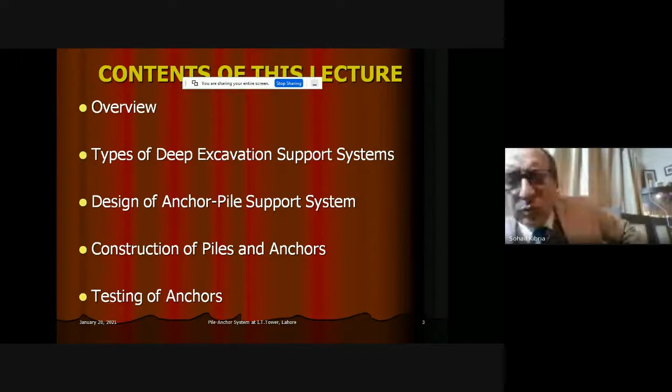Sorry for that. So very quickly, this is going to be a long lecture, and I hope you will bear with me. I have tried to make it interesting, but I'll be passing through quickly. Such lectures, which are of short duration, 1.5 to 2 hours, are not meant to give you everything and not meant to make you a real expert, but they prompt you. Such lectures always give you a lot of information. They prompt you to make a further supplementary study of manuals or books or through the internet, going to credible sites.

I'll first give you an overview of what this deep excavation support system business is and why it is necessary. Then I will define various types of deep excavation support systems, because it is not the pile anchor system which is the only system available. Even in our country some other systems are being tried, and worldwide there are many systems available. Then I'll discuss in detail the design of the anchor pile support system, the design of anchors and the design of piles, and then how they have been constructed, particularly at this tower location.

And then I'll concentrate on the quality control aspect: testing before construction of the working anchors or contract anchors, and testing during their construction. So let's have an overview.

Why are these required? We should all know that it's not only Lahore, rather all the big cities, all the metropolitan cities in Pakistan and abroad, the land is getting scarce and expensive. So people are concentrating in big cities to raise vertical buildings. If vertical buildings have to be there, then naturally they will need basements for car parking purposes and other purposes too. Taller the building, generally more will be the number of basements. And so when we have big, deep basements, we have to have deep excavations.

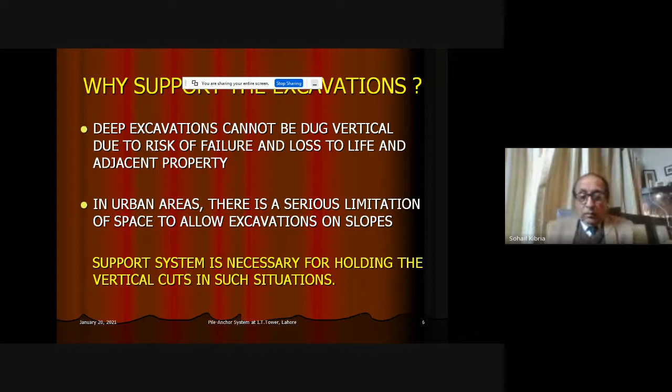So here we conclude that we have to provide such support systems. Support systems have generally been provided here as temporary works, that is, to aid in holding the vertical sides of the excavation as the construction proceeds.

And then they become useless. Some engineers consider this a waste of money. So why not build them as part of the permanent works, as part of the permanent structure? This can also be done. So both approaches are there.

If we have to design for permanent conditions, such pile anchor systems have to be heavier, with increased safety factor, and the materials and other specifications will also be stricter. But this one, the IT tower, has been designed, its excavation support system has been designed as a temporary support system. Now, what are the various support systems which are available?

One is very common, conventional reinforced concrete retaining walls. In common houses, like double-story houses, you see basements, so people will make basements either of brick masonry or of thin reinforced concrete wall. Both options go side by side, but damp proofing is a real issue. In many other areas, reinforced concrete walls can be constructed to a deeper level.

Then another option is the sheet pile, a thin sheet of metal structure, and they act as a deep system going into soil, and they are called piles also, sheets driven. They're driven normally. The basic issue is that they are not manufactured here, so their availability at short notice is difficult. Then the third type is RC, meaning reinforced concrete diaphragm wall and tieback anchors.

Sometimes we can construct a thin wall of concrete called diaphragm wall with special equipment. It may have anchors, or if it is not deep enough, it may be without anchors.

Then there is another type which is called soldier piles, pile and tieback anchors and lagging. I will explain to you what is meant by lagging, what these horizontal elements are. Then there are soldier piles with struts, the compressional elements, using frames. Then soldier piles have been used with tiebacks, and this is the case of IT tower, soldier piles and tieback anchors, anchored and tied back into the backfill.

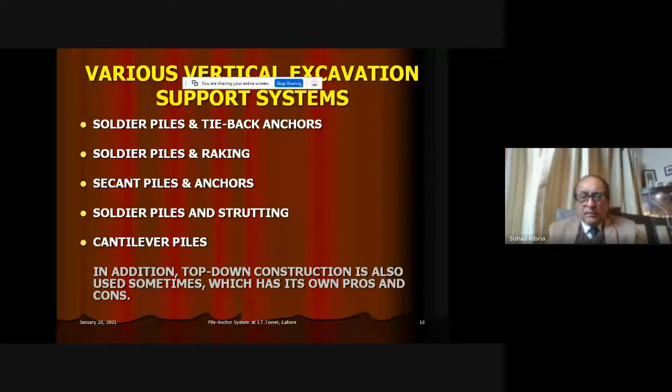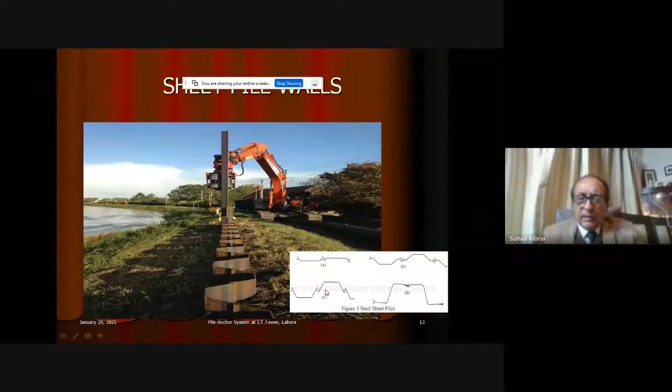Here you see a view of the sheet piles being driven by this heavy machinery. You can see this trapezoidal section of sheet pile on your screen. There are many other options available in the cross section of sheet piles. These can be manufactured into any desired cross section and of any thickness depending on the requirement. So here you see some of the cross sections of sheet piles, units which can be interconnected easily.

What's the diaphragm wall? It's a thin reinforced concrete wall.

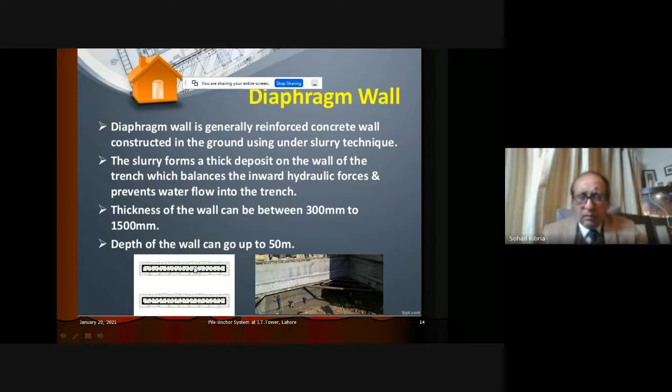When the whole long excavation is completed, it is filled with reinforced concrete. This is how a diaphragm wall goes. Deeper diaphragm walls do have tieback anchors too.

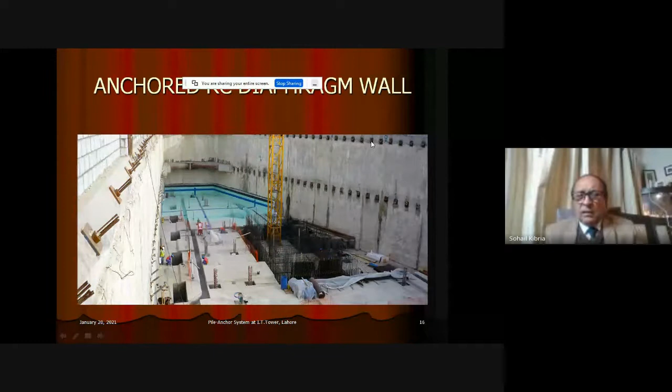Here is a view of a deep diaphragm wall secured with anchors. Can you see these anchors? These are the anchor plates, and this is the raft of the basement. In place of anchors, if you don't want to go for anchors, we can use strutted struts or a strutted kind of frame within the excavation.

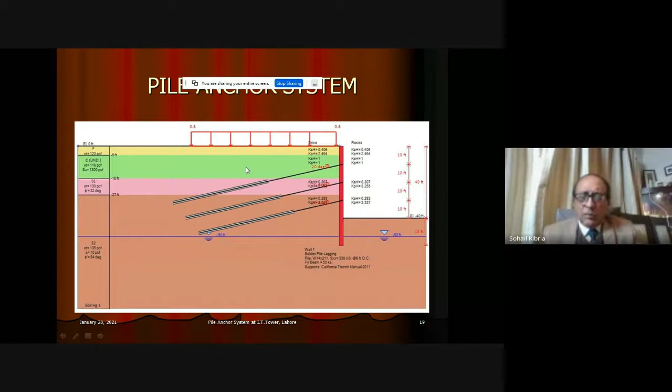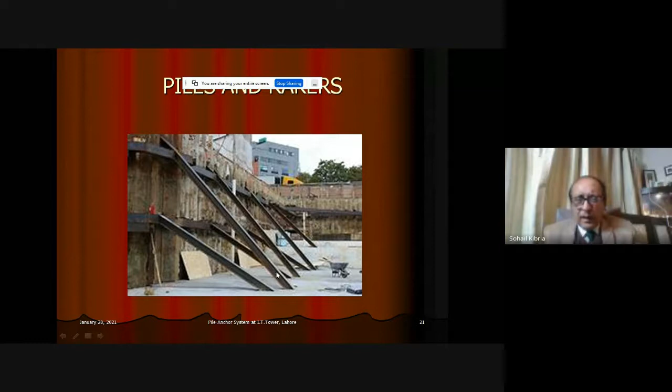So here, the wall of piles is supported with wales, and the wales are in turn supported by inclined supports, the rakers or the rakes.

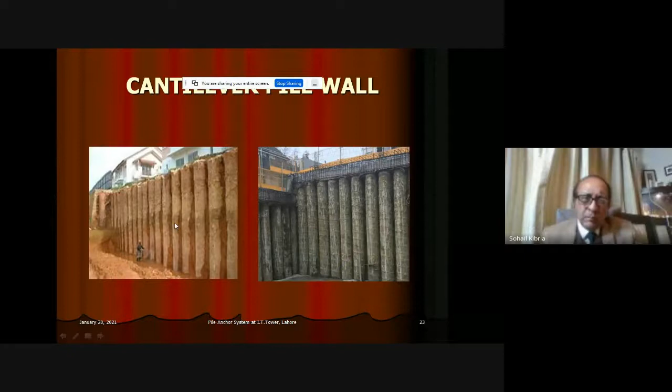Here, you have the reinforced piles, and there is a clear gap between all the adjacent piles, so that the soil is supported by arching. This is kept in such a way that the soil will not get squeezed out. And in tangent piles, the pile surfaces are exactly touching each other.

But don't think that this is a good waterproof system. If you have a high groundwater table and want to construct tangent piles there, water seepage will occur. It will not be successful. To control the seepage of water and to guard the excavation against high horizontal thrusts, secant pile walls are used.

There are different kinds of secant pile walls, two of which are more common. One is the type which is cutting hard to soft or hard to firm, meaning there are two types of piles: one reinforced, the other unreinforced. First, the primary piles are made, and they are unreinforced.

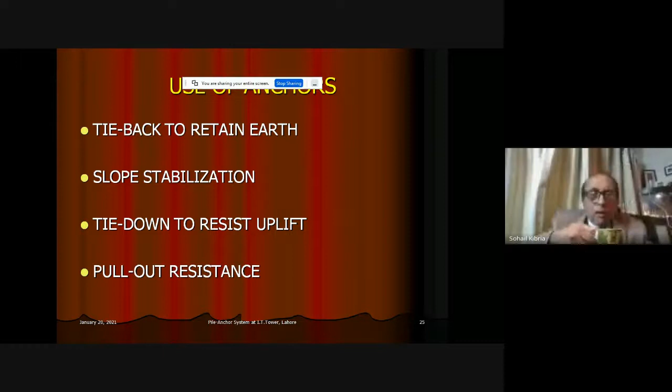Similarly, when there are pull-out forces, we sometimes provide anchors to resist the pull-out thrusts. Anchors are used for both temporary and permanent systems.

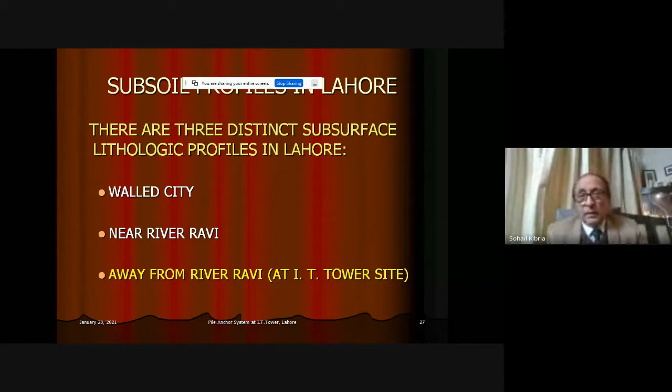So, jumping to the IT tower, let's look at the soil condition and the subsoil characteristics in Lahore. First of all, Lahore has three different subsurface lithological profiles. One is the typical profile of the walled city, where we have deep fill, like 35 to 40 feet, generally very big, very wet, and very heterogeneous, not reliable.

Second is the deposits of soil near the river Ravi, because Lahore is laden by the deposits of sand of river Ravi, which are fine sand generally, with a variable content of silt. But as we move away from river Ravi, the stratigraphy changes. We have silt deposition, and the thickness of the cohesive silt cover, or low plastic silt cover, goes on increasing. So at IT Tower, we are having this kind of situation.

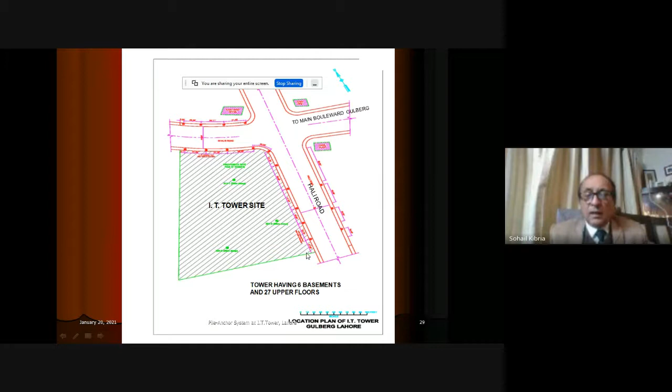So if you look at the IT Tower, it is standing there. It has 6 basements and 27 upper floors. If this is Hali Road, there's a road coming from Main Boulevard running parallel to Hali Road. At this corner is the IT building. Many of you might have seen this building, and you can see there are adjacent properties, roads on two sides, and buildings already existing on the two sides.

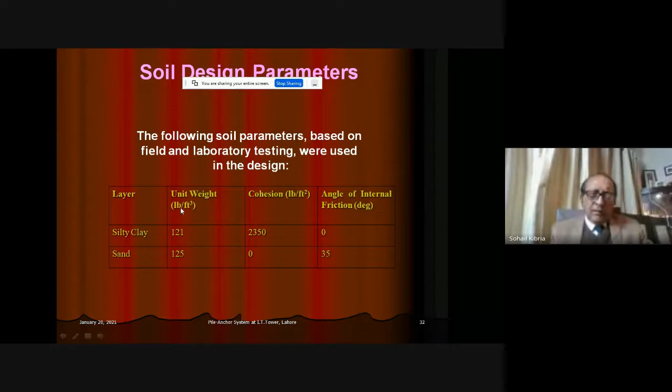So typically, just to show you a glimpse, we call it silty clay, although this is silt of low plasticity, and like that.

What has been discussed, I'll be concentrating on the geotechnical design. Structural design is a separate entity. Here we will be discussing the geotechnical design.

Several procedures given by several notable codes and manuals are available. The first one is the Federal Highway Administration of US's code. Then there is the Canadian Foundation Engineering Manual, which gives a different procedure, considered more complicated, requiring more rigorous analysis, and making force polygons looks difficult. NAVFAC, Naval Facilities Engineering Command of US Navy, manual gives a simpler method but is considered rather conservative, so any facility constructed with this will be expensive. Besides, the trenching and shoring manual also mentions this, AASHTO standard specs for highway bridges give this, and in Eurocode 7, there are guidelines for this.

At that time, we had selected the latest edition of Federal Highway Administration of USA, so this system was used by us. Later on, some comparison was made by me and a couple of my co-authors to find out the comparison between the design obtained by different codes, and we had a very good conclusion. One was that this design was satisfactory.

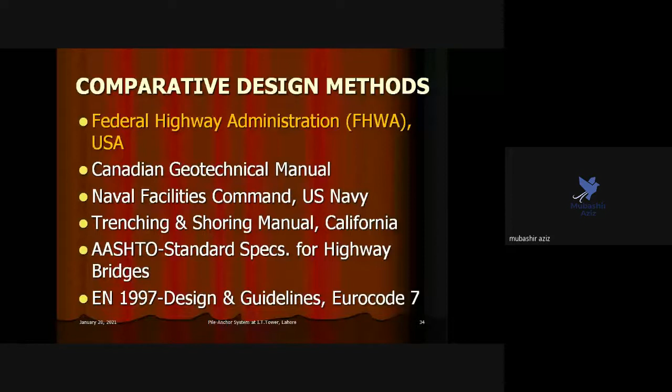So, first of all, when the space is too narrow, we don't expect to have walls and slabs in the usual way. In narrow spaces, typically sewage pipes are laid. The pipes of the sewage system, 6 feet diameter, have typically been laid in Lahore at many places at about 25 feet depth below ground or so. So when we do so, the system is there wherein walers, laggings and soldier piles can be effectively placed in sections, struts can be effectively placed, and laying of the pipe continues.

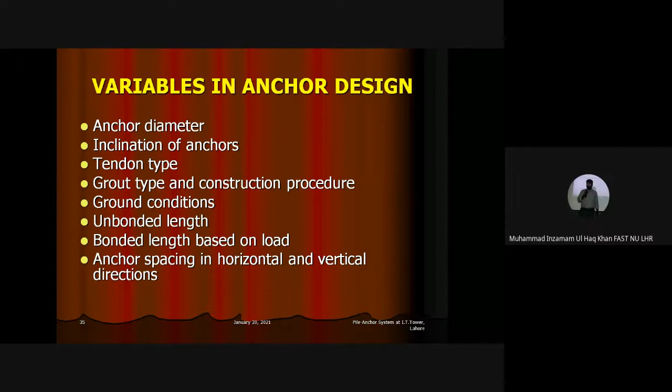Bonded length is based on load and anchor spacing in the horizontal and vertical directions. So what has been the basis of anchor design? The development of bond at the ground-grout interface.

Understand that when you have a steel anchor embedded into grout, and the grout in turn is embedded into the surrounding ground or soil, one mode of failure is that the bond between ground and grout fails - that should not happen. Second is the bond at the grout and steel tendon interface, the reinforcing tendon interface - that should not fail either.

Then the tendon itself should not fail in tension; its breaking strength should be adequate with the required factor of safety. The fourth mode is that the whole grouted anchor, along with a block of soil or rock, should not be pulled out.

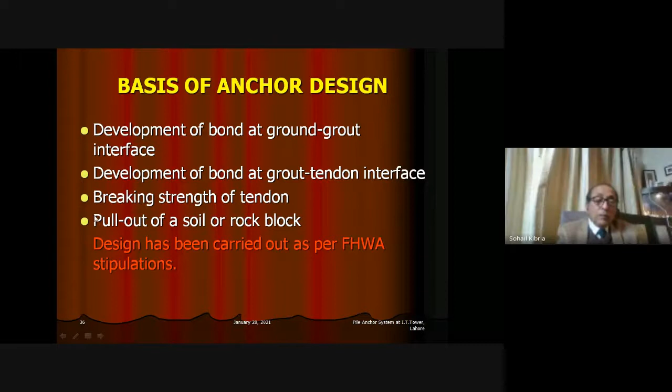I just tried to explain that this is also a mode of failure in weak soil, in which the whole block of soil may move out. So the design has to meet these checks.

Now, design of bond length, which is the ground-to-grout interface - there are published values available for this, and various ways we make use of them for different types of soil, giving ultimate bond strength, bond stress, or ultimate load per unit length. This is available in the literature in two forms.

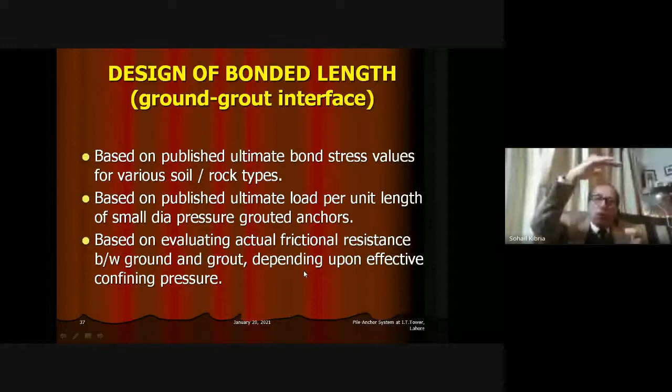This is based on evaluating the actual frictional resistance between the ground and grout, because when the anchors are in the ground, there is some load of the soil over the grouted portion of the anchor. The deeper the anchor, the more the soil load and the more the normal pressing force. The higher the normal force, the more the frictional or pull-out resistance - they are related to each other.

Now, how to calculate the design earth pressure? For the design of a soldier pile wall without anchors, the theoretical active earth pressure diagram using Rankine or Coulomb methods can be used, which you are very familiar with - that famous triangular distribution.

But for the design of an anchored or strutted wall, the deformation pattern is quite different. It's not triangular anymore - due to the restraining effect of the anchors, it's almost close to uniform stress, and the above earth pressure diagrams are not applicable.

What I've seen in Lahore - there were some collapses in such systems, like the famous collapse at Alamgir Tower on Mall Boulevard.

So I came to know after reviewing their material that they had incorrectly calculated the lateral stresses. They had used this Rankine distribution in place of the one which is to be used for anchored systems. This is your Rankine or Coulomb type.

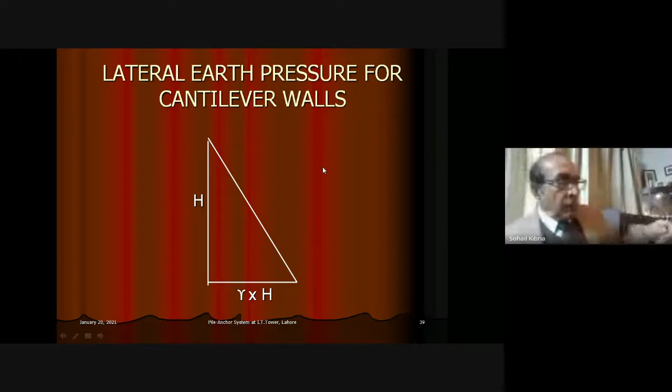You see the stress distribution, the lateral stress. If this is vertical, you multiply with K gamma h, and if you want to find the load, you again multiply with h and divide by half, so you get the area of this triangle. Gamma h square over 2 is the vertical stress. Multiply this with k, you get the lateral stress, and perpendicular to this face, if you multiply by the unit dimension, you get the total load. I think this is basic civil engineering that you must have known from your bachelor's level.

So unlike this system, earth pressure for anchored or strutted walls is different. Earlier in 1967, Terzaghi and Peck made the pioneering effort to give these values or diagrams for homogeneous soils. Later there has been an approach to calculate the stress distribution for stratified soil. One method is the limit equilibrium method, the same slope stability type approach, in which you find the factor of safety for a surface, and one tends to find the least factor of safety for the possible failure surface.

So using any slope stability evaluation method, like SLOPE/W if somebody is using GeoStudio, or the FHWA apparent pressure diagram. So in IT Tower, the FHWA apparent pressure diagram was used. Why is it called apparent? Because it's not actual, but modified, based on recommendations given on the basis of their study and instrumentation of excavations, showing how the pressure distribution will be.

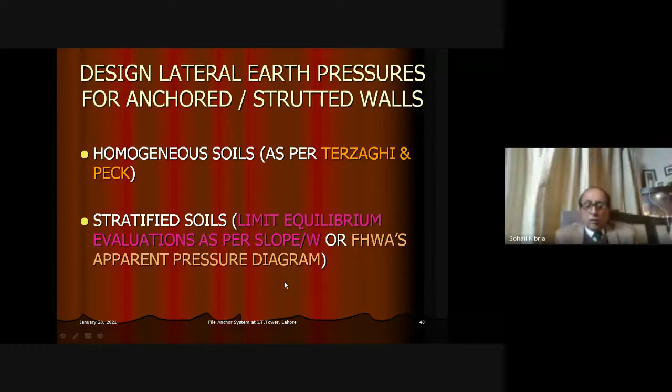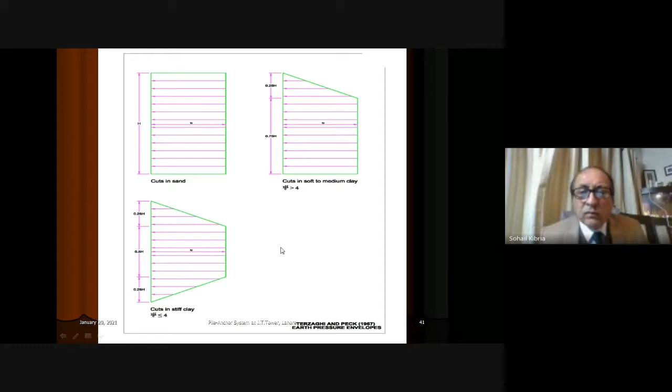So this is old Terzaghi's distribution. Terzaghi, back in 1967, said that for a cut in sand supported with anchors or struts, assume a rectangular distribution. If it is soft to medium clay, assume this kind of distribution, and when it is a cut in stiff clay, this kind of distribution, and their ordinates and values have been given. So that was at that time.

But now FHWA provides a method based on finding the apparent pressure from the distribution style given by them. What they say is that the active pressure acting over the excavation depth, that's the total load by the active earth pressure, is evaluated by Rankine. When the total load determined is increased by a factor of 1.3, the factored load is used to calculate P. I'll show you in the figure, it will be more clear.

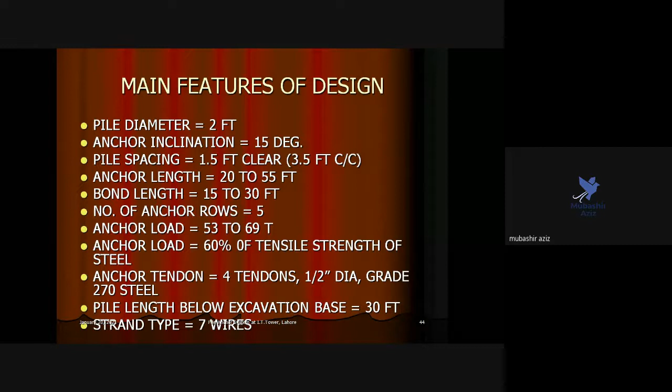सर ये जो एंकर्स की वर्टिकल स्पेसिंग है, इसका स्पेसिफिक क्राइटेरिया क्या होगा, क्योंकि we have an option to have more number of anchors with shorter length or longer anchors with less number of anchors itself. तो ये किस बेस पे हम इसको डिसाइड करते हैं?

देखें, बेसिकली इसमें जो पहला एंकर है, ये ग्राउंड से कितने फासले पे हो, the overriding factor is the location of utilities, सबसे अहम वो है, plus it should be having sufficient embedment so that there is a reasonable normal load onto it, ताकि एक reasonable frictional resistance बन जाए। ये ना हो कि इसको बिल्कुल करीब कर दें तो फिर आपकी एंकर की लेंथ बहुत लंबी होगी और it may interfere with the utilities।

बाकी जो एंकर्स हैं, कई दफा ये होता है कि नंबर वन दे are empirically derived from experience, but when I have been carrying out these designs, these can be adjusted to see how much reasonable is the length of the bonded part। देखिए, bonded zone को आप 100 फुट गहरा तो नहीं करना चाहेंगे, that will be too deep, it has to be reasonable। Of course many combinations are available, but something like 30, 40, 50 feet of the bonded length looks very reasonable, इससे ज़्यादा हो तो वो बढ़ जाता है।

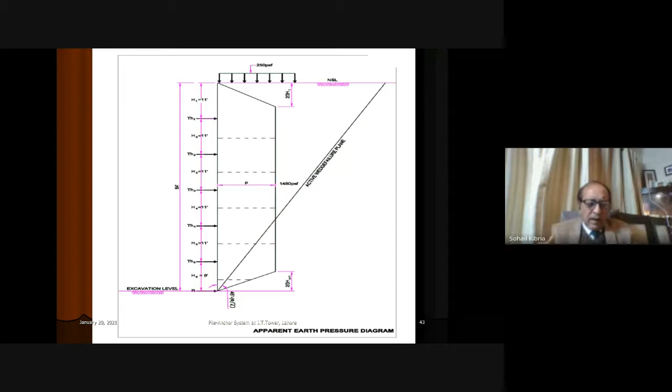एक रफ कुलिया की बात अगर करूं, देखिए we have to design the wall and also consider that after all it is civil engineering, so there could be some little deformation। If we want to keep it exactly deformation free, then as a rule of thumb the anchor spacing should be less and the number, both in vertical and horizontal directions, as minimum as possible to make it a stiffer element। और ज़्यादा stiffness element की तब requirement होती है जबकि हमने इसको permanent work के तौर पे इस्तेमाल करना है।

Temporary work के लिए इतना नहीं होता, लेकिन normal इनकी जो vertical spacing है, ये 10-12 फीट से लेके 16, 17, 18 फीट तक, अगर अच्छी फॉर्मेशन है - you see depends on the type of soil also, उसकी strength value क्या है, 18-20 फीट भी हो जाती है। It goes on like this, so there are many variables। ये हो सकता है कि शुरू में experience gain करने के लिए किसी particular site पे 2 या 3 trial करने पड़ें spacing के, then you arrive at a reasonable solution which looks more practical।

एग्जैक्टली। थैंक यू वेरी मच। वेलकम।

आप देखेंगे यहाँ 24 इंचेस यानी 2 फीट के पाइल्स इस्तेमाल किए गए और एंकर्स have been placed in 15 degrees। Well, the inclination is also arbitrarily selected, but I gave you the rule that steeper the anchor, lesser will be the load onto the anchor and more force will be going towards the pile itself।

फिर पाइल स्पेसिंग आ जाती है, क्योंकि आइडियली अगर horizontal हो जाए 0 डिग्री पे तो आपके पाइल के ऊपर कोई लोड नहीं आएगा, ठीक है ना जी। By making it inclined, आप पाइल के ऊपर लोड का पार्ट ऑफ लोड उस पर ट्रांसफर करते जाते हैं।

फिर पाइल स्पेसिंग इसमें रखी गई थी। मैंने अभी आपको दिखाया था ना, there are tangent piles, there are contiguous piles and there are secant piles। So we have an option कि contiguous pile में कितना gap हो। If the type of soil is not self-supporting और आप ज़्यादा gap दे देते हैं, it will squeeze out and then one has to consider supporting the soil with some additional arrangement like shotcreting and putting net and shotcreting, or taking some other measure।

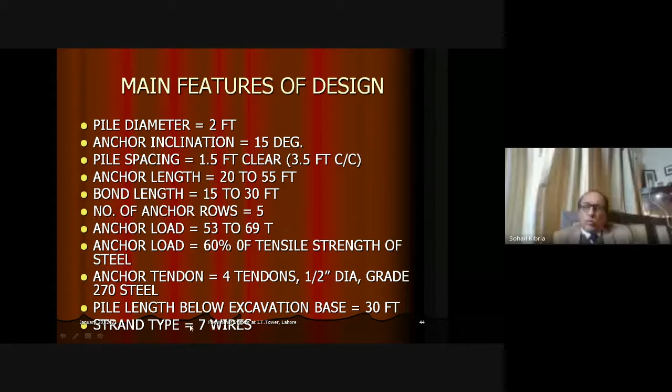Design of bracing system, different failure modes. This bracing system - the piles are the bracing system, and the strands are the bracing system.

Anchored pile wall may fail in the following modes, and all of these had to be checked in the design: tensile failure of the strands themselves, failure of bond between grout and soil and bond between strand and grout, failure of soldier piles in bending - the structural and flexural strength of the reinforced concrete pile in bending should be adequate, and failure due to insufficient passive capacity in front of the pile.

Because 30 feet is embedded, if that embedment is insufficient, the pile may fail due to lateral thrust because of low passive resistance below the excavation base. Failure by overall rotation of the whole system is very serious, and this needs to be checked by a slope stability program like SlopeW or some other mechanism. Also failure due to insufficient axial capacity of the soldier pile themselves.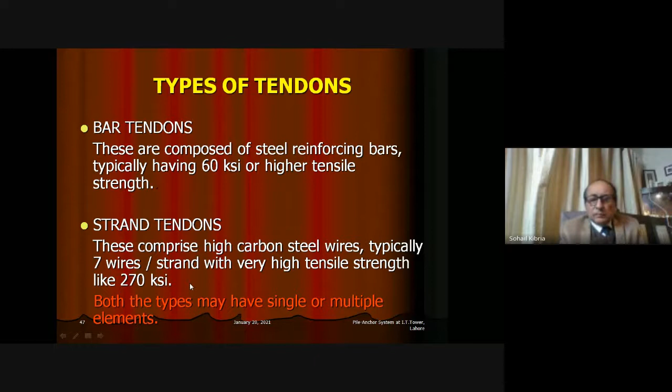Grouting type: there could be straight shaft gravity grouting or pressure grouting, and grouting afterwards, after placing the anchor under pressure, and under-reaming, meaning increasing the diameter with pressure or by some other means. Under-reaming is basically not by pressure, but by boring during placing the anchor in such a way that the diameter gets enlarged - that's called under-reaming.

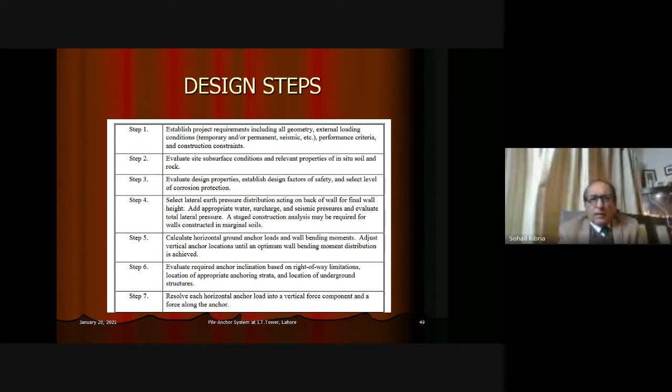I'll give a copy of the presentation in PDF format afterwards. So the steps that I'm going to narrate, you will be reading these in two slides. There are steps because the time would be limited - I have to show you a lot of detail, so you'll be reading it yourself.

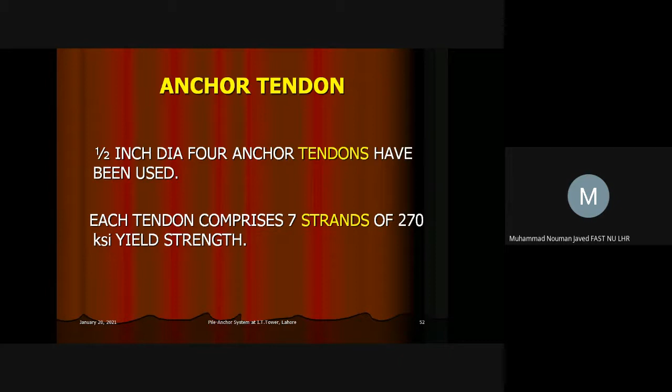The portion of the anchor falling within the Rankine wedge, which is going to move during failure, that portion has to be kept unbonded. Because if that is not unbonded and we bond in there, during failure the whole load will be acting onto the anchor - you got my point of view? During failure, that load should not be counted in the load on the anchor. So that portion is separated physically from the anchored steel, and frictionless rubber tubing is placed in that part so that it remains practically almost friction free, close to that.

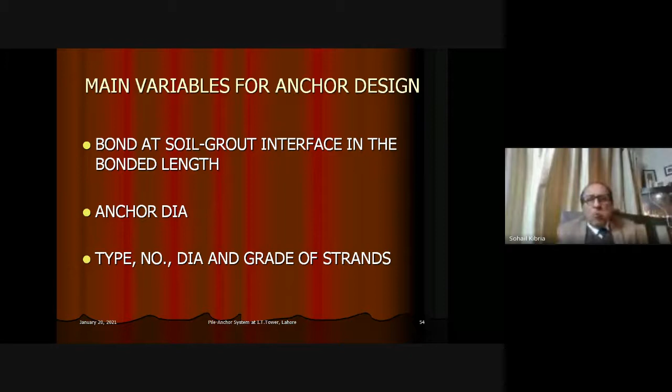Here you see, I've been talking of the apparent pressure diagram given by FHWA.

It says, first of all, the lateral earth pressure is equal to — yani lateral earth pressure se murad hai aapka earth pressure because of the horizontal effect, in an itemized form, these arrows. At any point, the lateral earth pressure is equal to the horizontal component of the anchor force. Theek hai na, anchor aapka inclined hoga, uska jo horizontal component hai, this will have to match that, right?

Thus, anchor force can be calculated. Aap jaante hain ki aapne anchor yahan laga hai, and yeh jo calculated lateral thrust hai, iske barabar jo horizontal component hai, that is a component of the anchor force, right? Ab anchor force ussse aap nikaal sakte hain by trigonometry calculation, and once you know the anchor force, you can find out the vertical component of the anchor force going into the pile. So that is the brief theory.

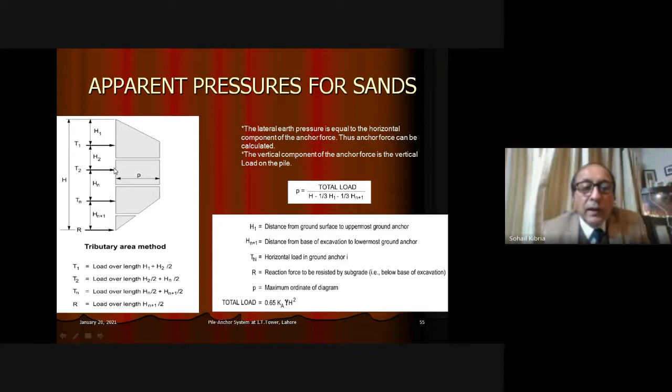Toh is tareeke se aap iski pressure diagram jo hai na, yeh P value aapki aa jaati hai. Toh pressure nikaalna asal cheez hai. Once you calculate the pressure, you divide that into different zones depending upon the locations of anchors that you have decided for your first iteration, and you allocate the area which is responsible for bringing load onto each anchor point. Theek hai ji, yeh baat ho gayi.

There's a commentary on the inclination of anchors. As I told you earlier, they may be from 10 to 45 degrees, and many values have been used. 15 to 20 degrees is very typical, though 15 to 30 is also written, but 15-20 is very common.

Regardless of the anchor inclination, the anchor bond zone must be developed behind potential slip surfaces, as I told you, behind at least the Rankine failure wedge. Steep inclinations may be necessary to avoid underground utilities, right-of-way constraints, or weak soil.

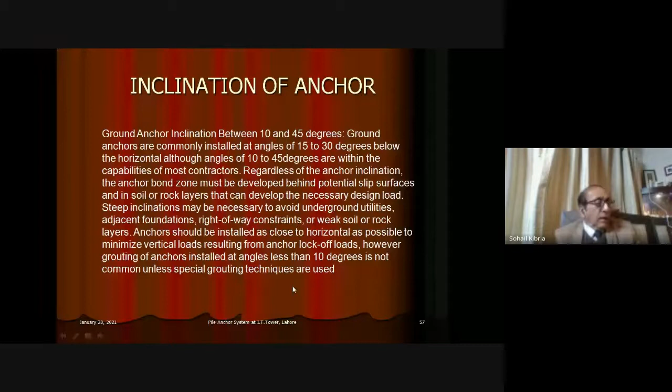However, grouting of anchors installed at angle less than 10 degrees is not common unless special grouting technique is used, because then it becomes difficult. Gravity grouting especially becomes difficult. Pressure grouting can be done, but at very low degree of inclination, gravity grouting becomes difficult.

So minimum unbonded length for rock and soil ground anchors is 4.5 meters. This should not be reduced. Even if your calculation of the failure wedge shows 3 meters, you have to keep the unbonded length as minimum 4.5 meters for strand tendons and 3 meters for bar tendons.

This is a principle given by FHWA, this is code. In general, the unbonded length is extended a minimum distance of H by 5 or 1.5 meters further behind the critical potential point. So if as per your Rankine wedge it comes to 5 meters, then you add 1.5 meters to make the unbonded length 6.5 meters.

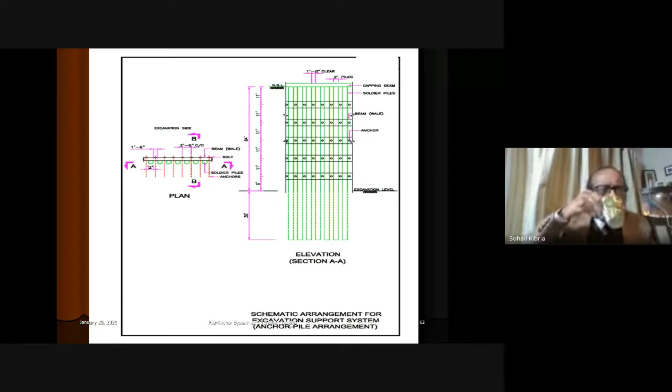You will see piles like this, these green ones, see 1, 2, 3, it continues this way. It is continuous and these are the anchor points. How many walers are there? 1, 2, 3, 4, 5.

No lagging here, no lagging has been used, so just wale beams are there and that's it. 11 feet, the last one is at 9 feet.

If you look at its side view, sectional view, now it is very interesting to see that as the depth increases - this is the base of excavation, 64 feet deep - the vertical overburden stress, effective vertical overburden stress, goes on increasing. Thereby meaning the normal stress at any depth increases with depth, it will be more with depth.

This means when normal force is more, any anchor for pull out will have more strength, it will experience more resistance against pull out at deeper levels. Hence you see the bonded length of the lower anchors has been reduced according to calculations. One factor is soil type, the other is depth, because the greater the depth, the higher will be the frictional resistance.

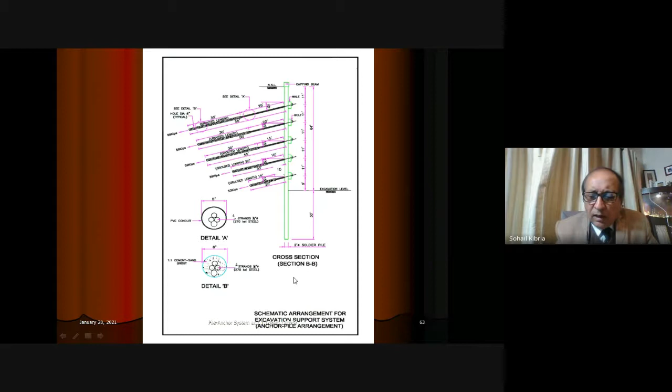Now going into construction, piles of 2 feet diameter and 94 feet depth were constructed by the rotary bucket method.

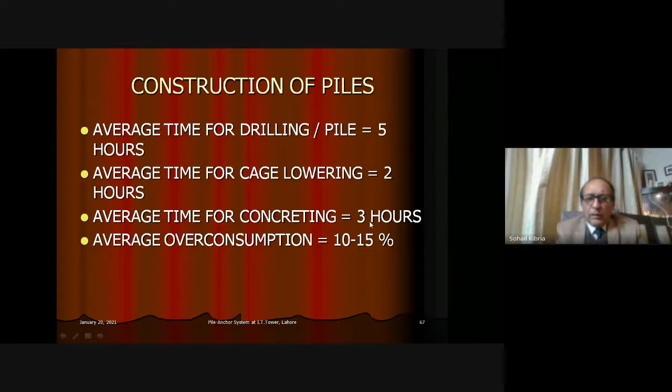Very interesting statistics: these piles, which were 94 feet long and 2 feet diameter, their average drilling time by the dry rotary bucket method was 5 hours. Cage lowering took 2 hours on average, and concreting took 3 hours, and overconsumption was of the order of 10 to 15%.

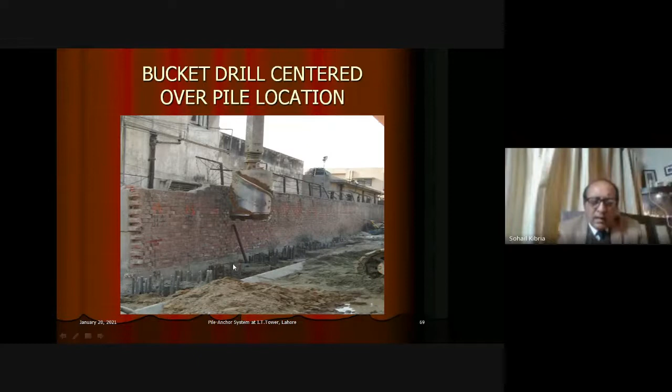Here you see the rotary bucket and cutters. The cut soil in the borehole enters into it, right? It rotates and presses against the soil and then makes a bore. The hole is done right adjacent to the property line.

Here you can see how many inches, you can now guess. This is the thickness of bricks, 3 inches. This will be 6 inches or so, maybe.

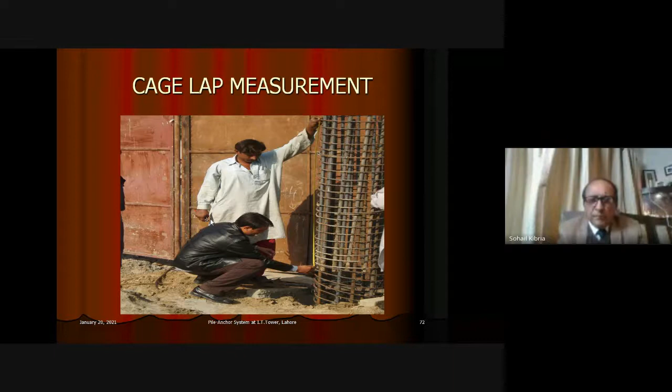So inclined drilling was done at 15 degrees. I'll show you how the anchor assembly was inserted. Grouting was done in 2 stages.

The first stage grouting was gravity grouting, which consumed 6 to 7 bags. After that, water flushing was done under high pressure to induce cracks in the first stage grout. First stage grouting is just to fill the hole by gravity, but then water flushing under high pressure is needed so that the grout material gets cracked.

And the second grout stage is under high pressure, not gravity grout. It allows the slurry, the grout, to penetrate deep into the cracked part and into the soil too.

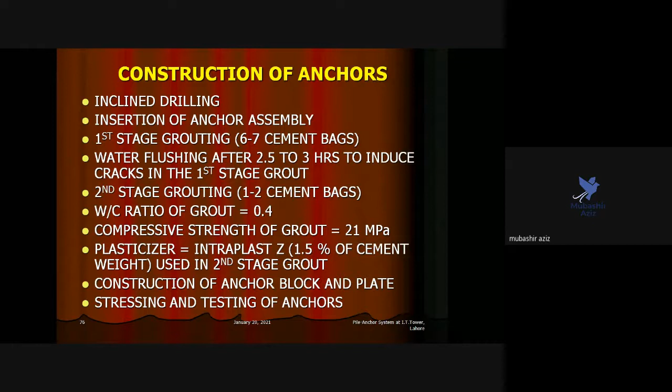How could we get this so high strength of grout, 21 megapascals? It is by addition of a plasticizer. Intraplast, 1.5% of cement weight, was used.

And you see, the grout ratio was 1:1. So it was a very strong material.

Average time for flushing of water is quick, just 2 to 3 minutes. Average time for second stage grouting is 2 to 3 minutes. Average time for first stage grouting is 5 to 10 minutes. So in all, the grouting mechanism has taken something like 10 to 12 minutes in total.

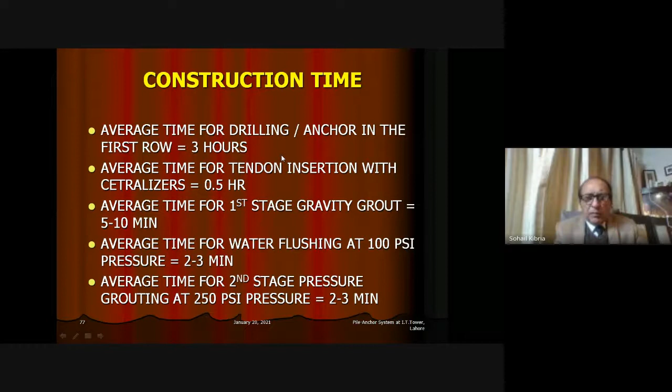Average time for tendon is half an hour. Time taken by drilling for anchor is 3 hours maximum. Then half an hour and about 15 minutes for grouting. So 3.75 hours, or roughly maximum 4 hours per anchor.

Now, boring for anchors. It was done at IT Tower by manual equipment using indigenous equipment, and it is labor intensive. Poor labor did the job very well. When some holes collapsed because of less holding capacity of the type of soil, the hole was filled with water to avoid collapses.

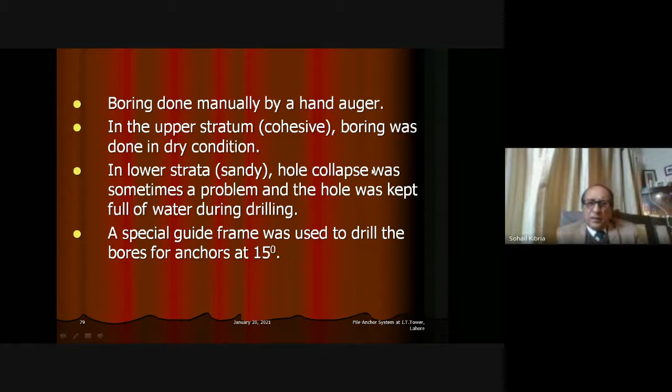A special guide frame was prepared to guide this auger, which is used to drill the hole. This is the inclined frame at 15 degrees to guide the auger drilling stem rod to make a 15-degree inclined hole. Can you see a beautiful, simple local arrangement to make inclined anchors?

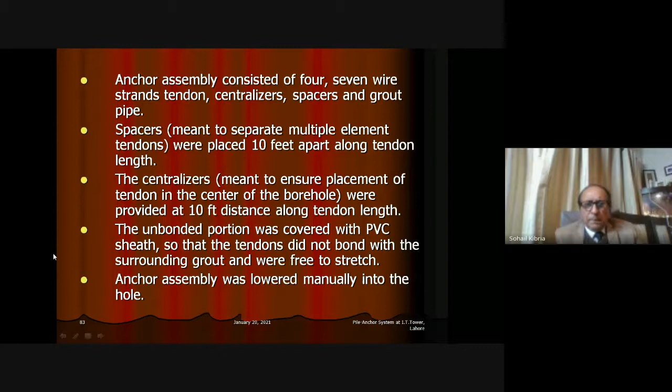Anchor assembly, well, we have already talked about it. Let's go into the figures. I've shown you many things. Anchor strand roll, they come in rolls like this. 270 KSI, you can see 4 such strands, and this is a grout pipe.

Second is a permanent fixture. It sets within the anchor, by which the first stage grout pipe is drawn out. So that's why you don't see the first stage grout pipe here. There are 4 strands and a second stage pipe, and that's all.

This assembly, you see, these are the spacers. Somebody questioned what is done to tie or keep the anchor in contact with the ground. So these are the spacers which are put at intervals to ensure spacing of the reinforcement bar and some cover.

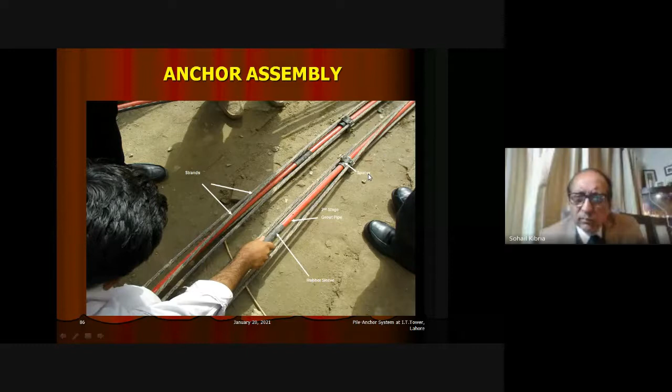The spacer, you see, like this. Second stage grout pipe is the red one. Do you see it? There are four strands, 1 2 3 4, and each one has 7 wires.

This is the anchor system. So this is how in the hole this is being pushed now by manual effort. So a hole at incline with the frame, then lowering it within the hole, and then will be the grouting. First stage grouting, water flushing, and second stage grouting.

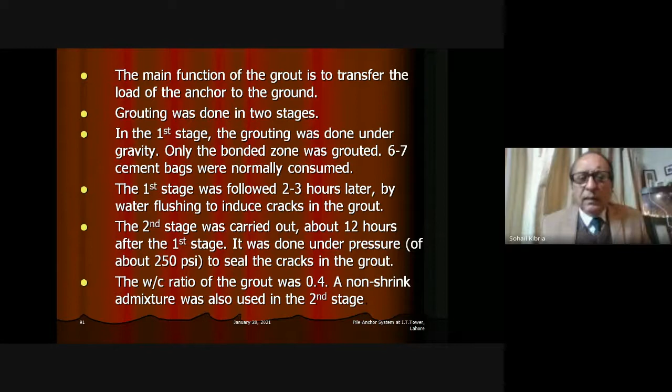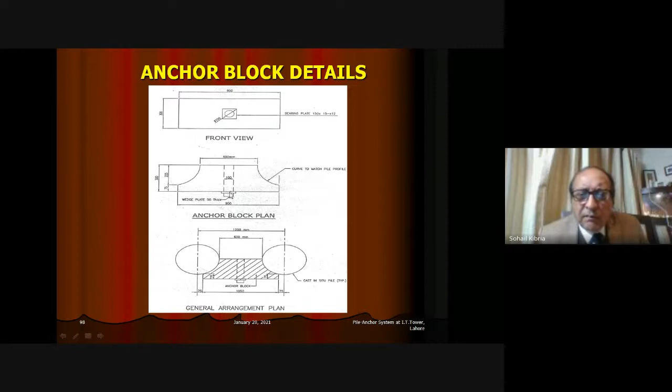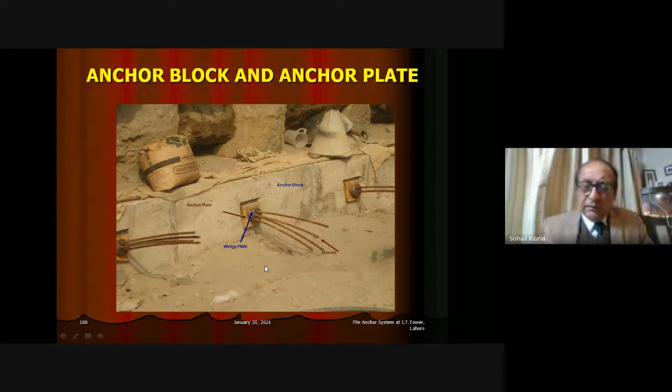How anchors have to be stressed - this is very important. It's not just that you put anchors and the system will start operating. No, you have to tell them, you have to tell them that they have to carry load. So you have to apply load onto them.

If you don't apply load, they won't be accustomed to taking load, and what will happen is there will first be some deformation in the actual work and then they will start taking load. What we want is that whatever movement has to take place, that should take place, and they should carry the load, and afterwards they should move minimal so as to meet the requirement of the standard.

So stressing of the anchors was started after expiry of 16 days of their age, and stressing ensures that a known load is applied to the anchor. Stressing also allows to establish that the required capacity has been achieved. So virtually every anchor has to be stressed.

So in a way, it's a kind of test also, that every anchor is being tested against pull out, we can say, by applying a hydraulic jack. After the tendon has been stressed to lock off load, the jack was removed and the tendon was held in position by the wedges. Then we would remove the jack and put the wedges so that the anchor remained in stressed position. That is called lock off load.

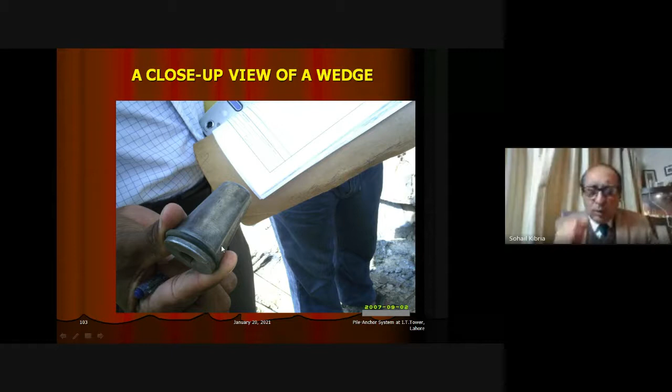You can see this is its smaller area diameter, and this is larger, and you can see it can separate. It goes inside and is secured with a metal ring, but it can even expand according to the size of the hole. It fits into the hole in the plate and holds a bar firmly.

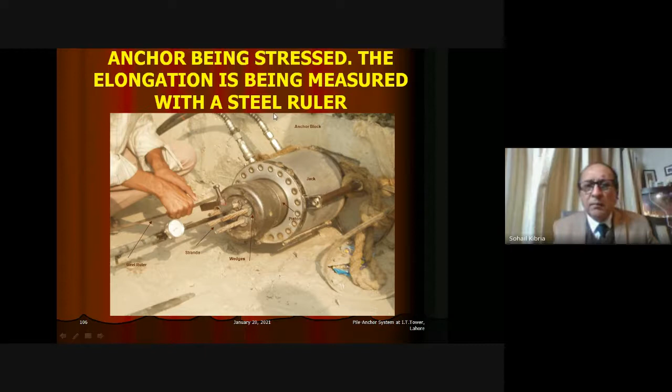See, wedges in place, wedge plate and the anchor plate. I think now it is very clear. So after this, testing is done to confirm that anchor can support load. So anchors are stressed.

Isn't it a good idea to have some kind of instrumentation like strain gauges on the anchors to monitor their stress relaxation in future? Because that is the most important thing, that they should not relax, they should always be under tension. So did we do any kind of instrumentation in this project?

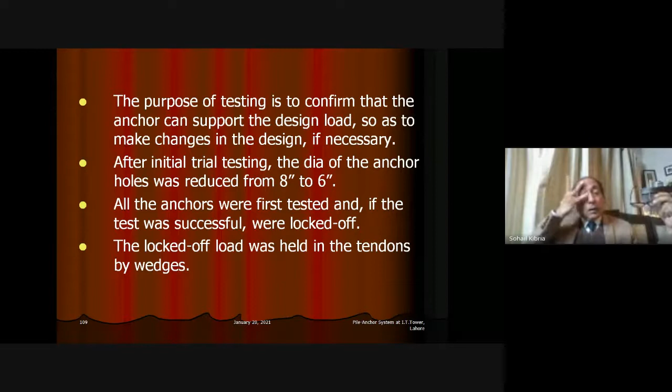No instrumentation. The idea is not bad, as you're saying. Relaxation is very important. The other method of having control is to measure or monitor the movements of the whole system. That is, if there is some kind of relaxation effect and accordingly there is some movement also of the backfill, that has to be indicated in some form in the overall system too. So monitoring on the surface was done, but there was no instrumentation done to find the relaxation, because otherwise it could have been difficult.

I tell you, at such sites we cannot go into this kind of activity which is not standard. The standard also doesn't require FHWA require that we should do like this, because they know that if it is a 64 feet deep excavation, it would be very difficult to bring high tables or high ladders and then go to different points and go on measuring the stresses by applying jacks or pressure cells.

Yes, in case of doubt, some of the anchors can be tested again and the stress can be found out. So, sir, they are regularly checked by knocking, meaning every anchor is checked whether the wedges are loosened or not. The regular checks that happen are done through surveying. We mark different points on the retention system, and then after a certain time it is checked whether there is any displacement or not.

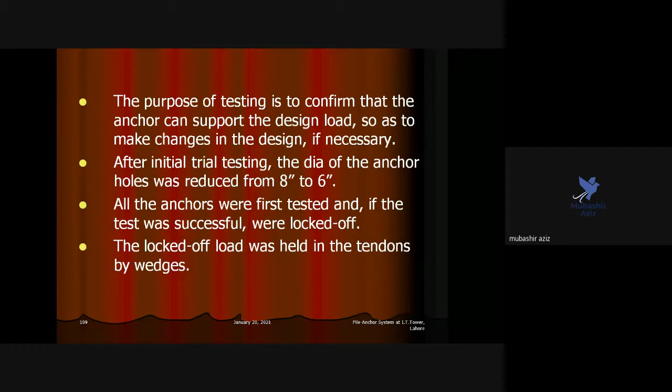Well, number one, a properly designed system, first of all, in which some anchors have been tested prior to construction of the anchors to find out the uplift load. I mean, some advanced testing, not as part of the project pile, some project anchors, some test anchors have been tested and their pull-out capacity or the load has been determined. And this has been done in adequate number, as was done here, and in different ground conditions as has been done here, then there is very little likelihood that a big number of anchors will start moving because the quality control will already be there.

If there is some movement, it may be sudden, but normally it will give some indication, and the whole system will not start moving all at once. So if we have time, more anchors can be inserted and driven—that is one remedy. Second, immediate arrangement should be made to at least start raking, if strutting is not possible, to start raking of the excavation.

One good key is that since these are temporary systems, as soon as the anchors are constructed, bottom-up construction should start immediately, because when the first roof slab of the first basement is cast, it will act as a restraining strut for the whole excavation. Likewise, when we go further up and the slab of the second basement is cast, that will be another strut.

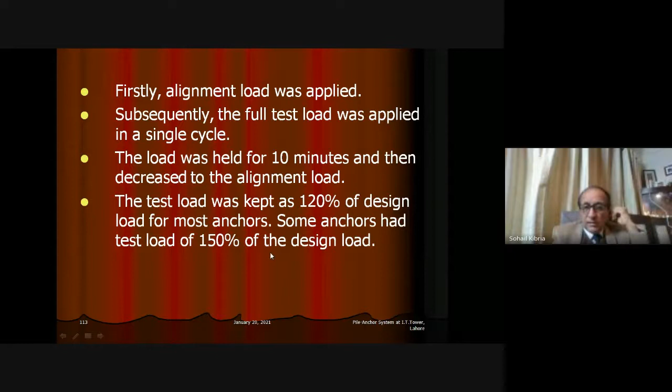Here you see the measurement being done for the proof test. What was the proof test? Firstly, alignment load was applied, then subsequently the full test load was applied in one cycle—120% or whatever. The load was held for 10 minutes and then decreased to the alignment load. The test load was kept at 120% of design load for most anchors; some anchors had test loads of 150% of design load.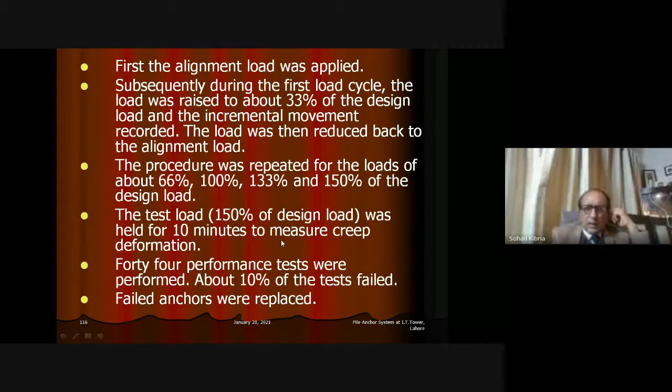In cyclic increments, it went up to 150%, 1.5 times the design load. This ultimate load was held for 10 minutes to measure the creep deformation. 44 performance tests were performed, 10% of which failed. Where tests failed, we provided new anchors. This was a sheet to record their values and cyclic behavior.

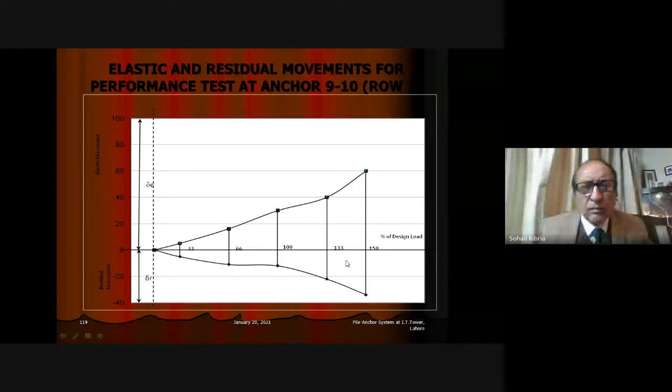You see, like this was plotted, and here you can see that for different percentages of the cyclic load—at 33% load—this was the elastic movement, but upon removal of the load, this was the permanent set, the residual settlement. Likewise, when there was this much movement, this much was the permanent set. So this is how elastic and residual movement and their theoretical deformations were calculated.

Criteria for acceptance of anchors prescribe limits of creep. Basically, there is a limit of creep, and elastic movement measured during the anchor test—that has a value.

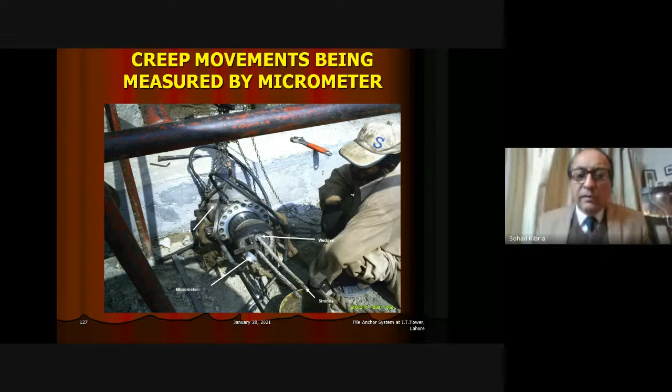De-stressing of anchors is required to be done. As I mentioned, when you do construction from the bottom upwards and you are casting slabs and walls, every slab acts as an abutting element, a strutting element to hold the opposite sides of the excavation. So simultaneously you remove the load and take out the wedges.

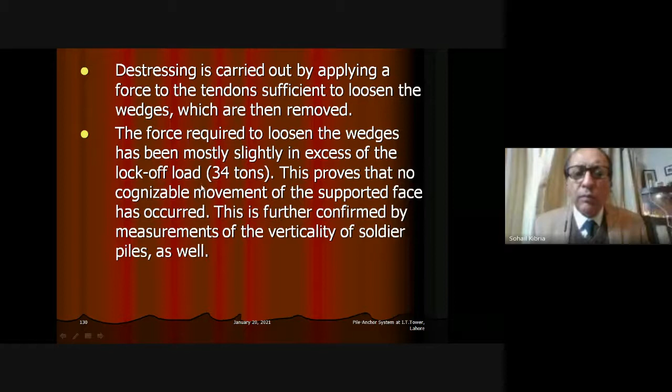So how is it done? First, de-stressing is done by applying a force to the tendon sufficient to loosen the wedges so that they become loose, which are then taken out. The force required to loosen the wedges has mostly been slightly in excess of the lock-off load, 34 tons. So in the end, this was the result.

So what would you say? These are the bored piles, 94 feet deep, and at the base of excavation they are 64 feet. I would say, so far as bored piling is concerned, they are of fairly uniform section, and the spacing is also reasonable and their surfaces are good. So good work, I would say. In civil engineering, these kinds of works are good.

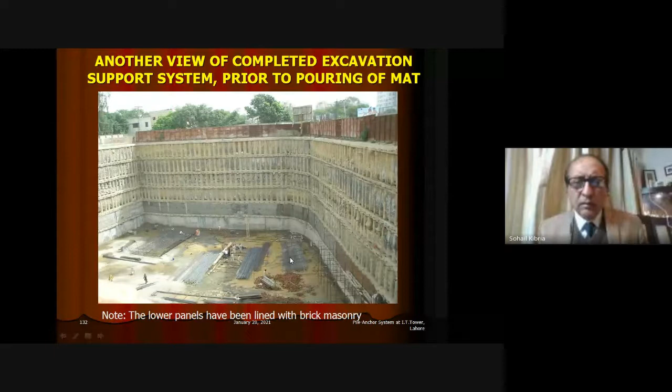There was no significant sloughing. You can see the anchor points here. This is a bigger view before pouring the mat. Now you can see mat construction. Column work started after construction of the mat.

Why do they... so was any dewatering generally required here? I think any dewatering kind was not done here. No, that was not required. Water table was deeper. Not done here.

Main causes of failure of ground anchors - what are the general reasons? Inadequate soil investigation, or if it is carried out, it is not interpreted properly. The design is faulty, the stresses have not been catered for properly. As I told you, one big cause of error is considering wrong value of stress for the cantilever system.

And lack of appreciation of safety of adjacent works, which is very important. Otherwise, these situations may lead to litigation in the courts, and arrests could be there, and that would be very serious - imposition of heavy fines and arrests and punishments and this and that.

Then incomplete structural detailing - this cannot be afforded. Improper coordination between the designer and the contractor and the supervising team. Poor workmanship by the contractor, by his machinery, by his labor. And sometimes the environmental factors are ignored.

What could be the environmental factor? It's not only the rise and fall of water table, it could be rainfall also. And some operations are not to be done during rainfall, and if rainfall is there, adequate measures for drainage or protection from rain and other things are really needed.

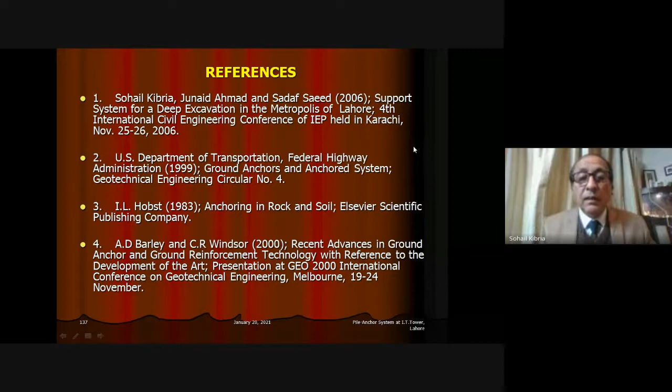Well, I just want to mention, one of my papers is, we referred here to, this was a paper published in 2006 - myself, Junaid Ahmad, and Sadaf Saeed, support system for a deep excavation in the metropolis of Lahore. This was presented in the 4th International Civil Engineering Conference of IEP in Karachi. I remember I went there and I presented this as our first marvelous experience.

So let me show you some photos of wale and strut system and tiebacks. Which one is this? Combination with soldier and tieback anchor at Pace Tower in Gulberg.

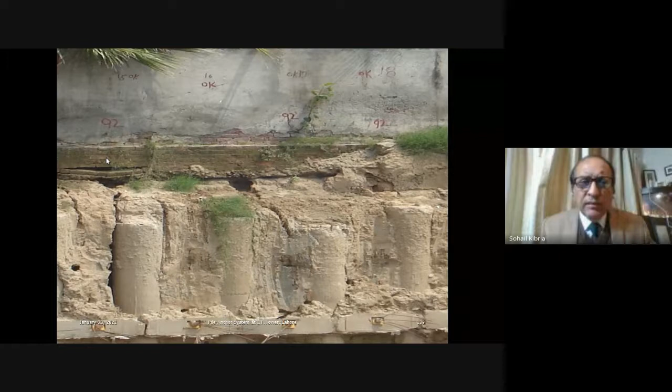इसका क्लोजअप दिखाया गया है, ये उसका व्यू है। So anyway, the system worked and it serves the purpose.

वो जैसे होता है ना आपका रंग फक हो जाना जिसको कहते हैं, मैंने कहा लो भी गए। Immediately I came out of the conference hall and started to drive my car। पहली दफा मुझे जिंदगी में लगा अपनी पूरी लाइफ में that I couldn't drive the car properly, मेरी स्ट्रेंथ नहीं थी स्टीयरिंग पे। मैंने कहा लो भाई ये तो बहुत ही काम खराब है, पहला एक्सपीरियंस और वहां पता नहीं क्या कैजुअलिटीज हो गई हैं, क्या हो गया, ये तो काम खराब है।

मैं बाय द टाइम आगे गया तो रास्ते में लगातार गाड़ी रोक के मैं अपने कोलीग से पूछता और मैनेज किया कुछ लोगों से पूछने का वहां आईटी टावर पे। वहां बंदा मिल गया, मैंने कहा ये गिर गया है, क्या हुआ? उसने कहा नहीं ये नहीं गिरा जी, देयर इज अनदर प्लाजा जिसका नाम आलमगीर टावर है, ये वो गिरा है। तो मेरी फिर जान में जान आई, और फिर मैंने साइट विजिट की और देखा कि हमारी साइड ओके थी और जो साइड कोलैप्स हुई थी वो अलग थी।

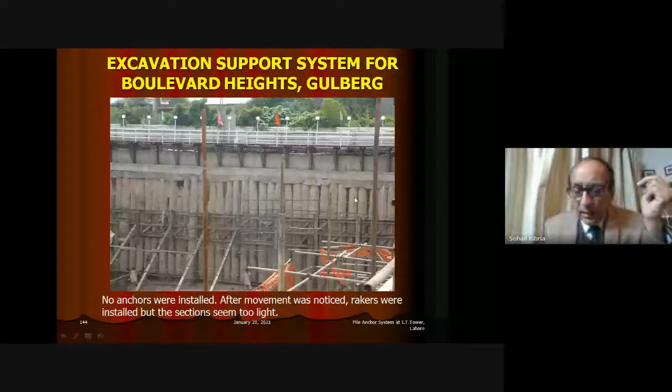उसकी तस्वीरें हम आपको दिखाते हैं। ये एक बुलेवार्ड हाइट्स है, ये क्लासिकल केस था जिसमें एडजेसेंट प्रॉपर्टी स्लिप्ड हो गई थी इनएडिक्वेट डिजाइन और कंस्ट्रक्शन की वजह से। ये देखिए स्लॉबिंग काफी हुई है, पाइल में गैप्स देखिए। ये मूवमेंट्स हैं, and these houses, their floors had moved and developed cracks।

ये देखिए आलमगीर टावर जो गिरा था, this was that। आप समझिए इस तरफ जो लिखा है, the whole back face has come down। This is the road side, right? So the pile wall is here, and on this side also, but this one on the back side collapsed in totality। आप ये देखिए, and the piles, they have come down like straws।

And I was told that a professor of UET, Dr. Aziz Akbar, was carrying out pull-out tests in the basement at the base of the excavation, which was 83 feet deep, a night before, and this incident happened the other day। ये देखें, the whole system is washed down। इसमें क्या मिसाल, ये घर बच गया काफी हद तक, थोड़ा सा इसका अगला भी गया।

It was not anchored, sir। We cannot see anchored। Oh, it was anchored। ये देखें आप, मैं आपको दिखाऊं close up कुछ इसके। Can you see here closely? The anchor cables, they are pulled out।

So the design was somehow adequate or there was something wrong। This plaza, जिसकी डिस्कशन मैंने आर्किटेक्ट से की थी और वो खुलते नहीं थे, बट आई केम टू नो कि वो नॉट फैमिलियर थे विद द कांसेप्ट ऑफ redistribution of stresses as is for the strutted or anchored systems। They had used a distribution, जो मुझे पता चला, which is for the normal overburden pressure triangular distribution of stresses।

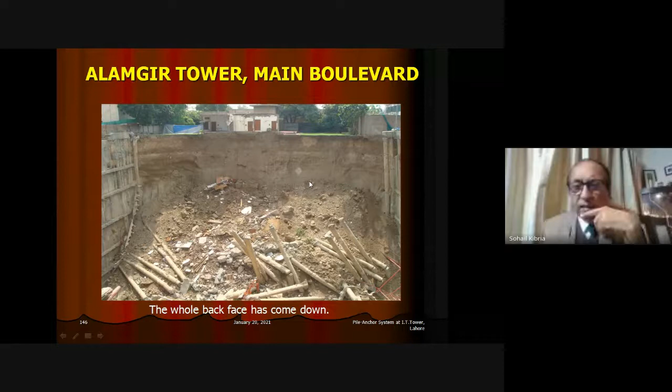ये देखिए आपको नजर आ रहा है, पुल आउट हो गए हैं वो एंकर से। ये देखिए ये तारे नजर आ रही हैं, you can see the cables, the strands, ये सारे ये देखिए। ये देखिए नीचे crane है, so that is looking like a toy crane under the pile, under the rubble।

So it was serious. While the other two sides where high buildings were there, they remained intact। Had those come down, then there would have been a catastrophe। ये तो बहुत inhabited जगह है, आप देख ही रहे हैं लोग और everything।

बट अब देख लें आईटी टावर के आपने पाइल देखे थे उनकी क्वालिटी, और ये देखें बोर्ड पाइल की कंस्ट्रक्शन, देखें ये कितनी फ्लॉफुल है। Can you see the bulging and you see improper control over the cross section and everything, the lack of control over the alignment। ये देखिए बीम्स की मिस अलाइनमेंट। तो इस तरह की जब चीजें हों, पोर क्वालिटी हो, तो खतरा बढ़ जाता है, the risk factors would increase।

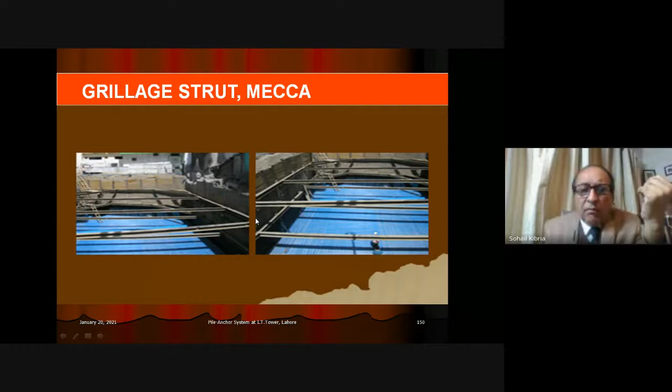Once I was in Makkah, what I saw was that there were 4-5 story buildings in the vicinity, and those conventional soldier piles in between had laggings, आपको नजर आ रही है ये वुड लेगिंग्स हॉरिजॉन्टल रखी हुई, जो टी या आई सेक्शन है उसके सोल्जर पाइल्स हैं, दरमियान वुडन लेगिंग है, और यहाँ वेल्स थी। ऑन दिस होल सिस्टम ऑफ स्ट्रटिंग फ्रेम, पूरी एक्सकवेशन में लगा हुआ टू होल्ड द होल एक्सकवेशन फेसेस, 4 फेसेस। ये मक्का में मैंने देखा था।

This picture was taken by me। And can you see the reinforced, the blue is the reinforcement bars covered with epoxy coating? Because in Middle East countries, there is a very aggressive saline environment।

So steel has to be coated properly, you see, quite often. Here they have used epoxy coating on the steel bars. So this is an experience which I showed to you and shared with you.